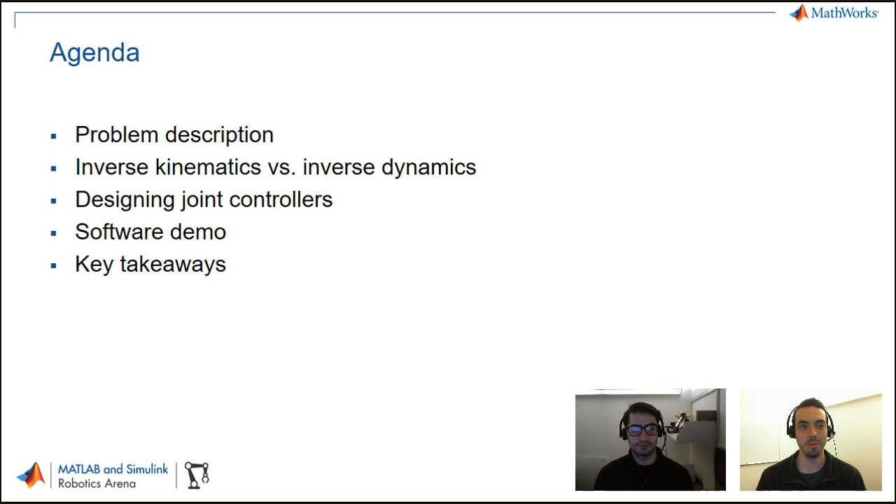So, what we talk about today is, first of all, what is the problem that we're trying to solve? And then we'll dig deeper into a couple of things, namely this notion of what is inverse kinematics versus inverse dynamics, which is going to be an important thing for today's video. And then also talk about designing controllers for the joints of a robot manipulator. Most of the time will be spent on the software, so that's what makes today extra fun. And, as always, we'll wrap it up with some key takeaways.

In the previous video, we had this robot arm here, which is the ROBOTIS OpenManipulator chain. And what we did is we created a couple of tasks, including grasping an object and moving it through a set of waypoints and even tracking its position to grab it. So we're going to continue with those same requirements, but now we're adding an extra layer of complexity, which has to do with actually controlling the joints.

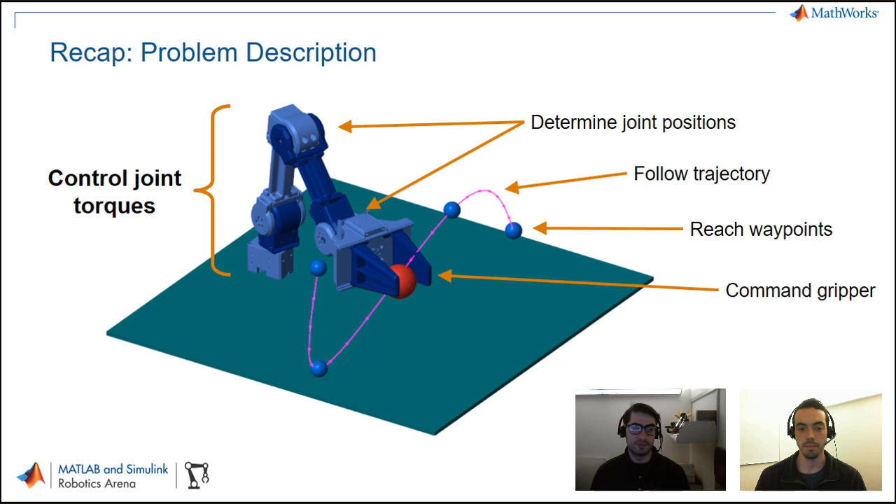Thanks, Sebastian. And one more thing, if you guys remember correctly, we did all of this in Simscape Multibody, and we used the option of using motion actuation for the joints. So that is why we were able to do this with just the position for the joints last time. This time we're going to be actually looking at some more motor performance.

Yeah. So this is ultimately the goal that we're trying to solve, right? You want to move the robot gripper or the end effector to a particular position. In the last part, we talked about kinematics, namely the forward and the inverse kinematics. And that's what maps you from the actual angles or displacements of the joints to the position of the end effector.

So forward kinematics is the easy one to solve. If you have the robot geometry, you can just figure out where a particular coordinate system is going to be. And then we saw how the inverse kinematics in the Robotics System Toolbox lets you use an iterative solver to figure out these joint positions given a specified position. And we were able to design all these algorithms by commanding that position of the robot.

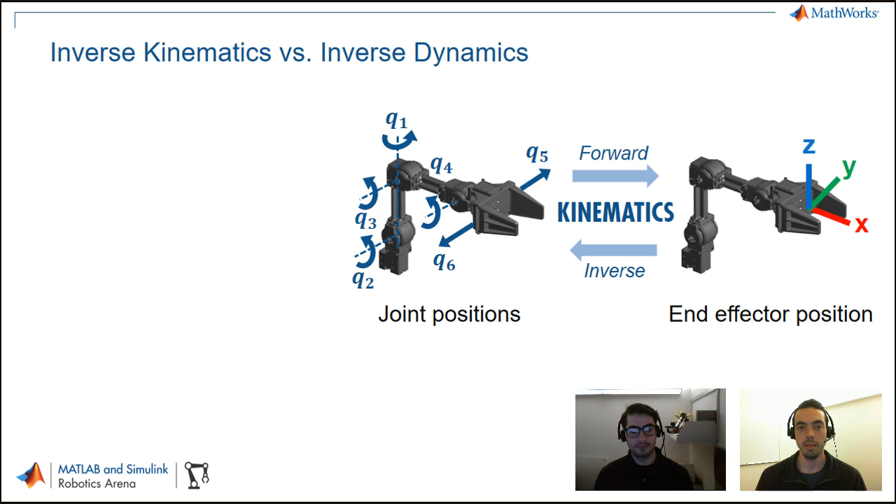The next step is then to consider dynamics. And this has to do with, given the angular or the displacement positions of your robot joints, what are the necessary forces and torques to make that happen? The additional information you need there is, in addition to just the geometry of the robot, you now need to know things like the masses, the moments of inertia, and so on. And that's what we're going to dig into.

Sebastian, in order to obtain those masses and moments of inertia, do you have some suggestions for that? Yeah, so let me jump over to the software really quickly. So what I ended up doing to get these masses is I found the Onshape CAD model for this robot arm. And what you can do in most CAD platforms is you can assign materials to these things. So for example, we know that this robot is 3D printed, so we pick a material that is related to that.

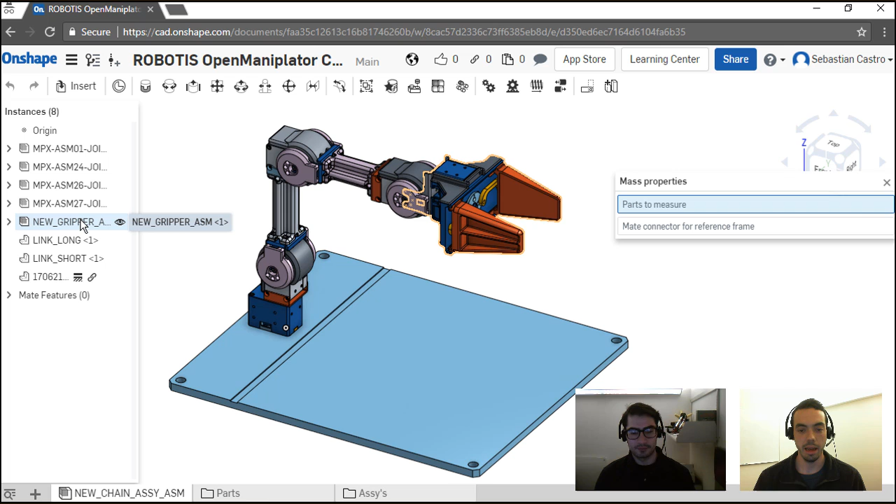And what you can do in most tools, like if you select a particular body or rigid link in your robot, you can open up these little mass properties, and then this gives you things like the mass, the center of mass, and the moments that are needed for those parts.

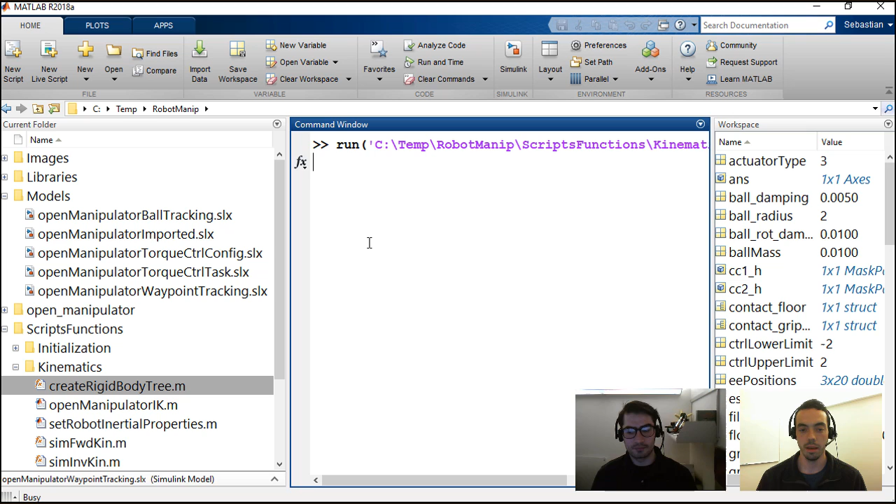When you go into MATLAB, when you define that rigid body tree, as you saw, we can basically define our manipulator by importing its geometry into MATLAB. Now we can also add its inertial properties. To do that, I've used a script that basically grabs all these values from that CAD model I showed you, and it assigns them for each of the rigid bodies that make up this robot.

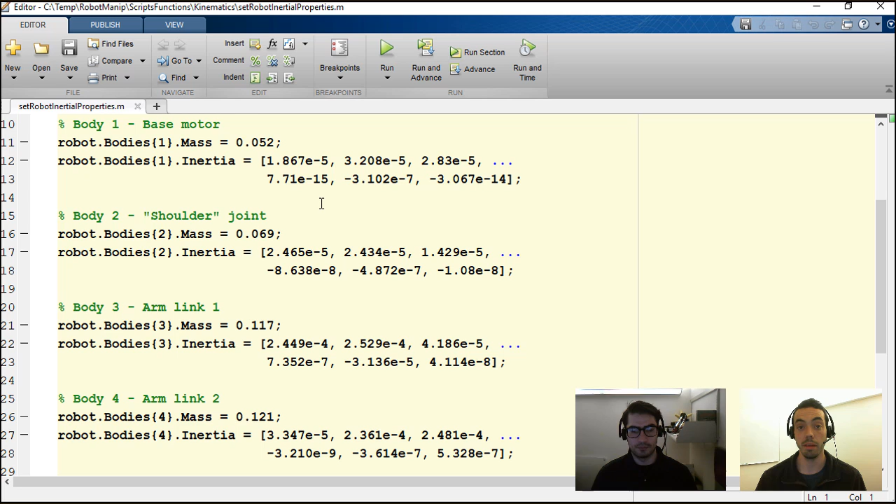So you see each body here has its own mass and 6 elements of inertia. That is the 3 moments of inertia and the 3 products of inertia that define the off-diagonal terms. So once we have this is when we can start solving the inverse dynamics for the robot. So we have that, but then the part that we're still missing is how do we actually assign these forces and torques? And to do that, you need controls, and that's really the main focus of this video.

You have your manipulator, you have your desired motion, and you have your actual measured motion of the robot. Now, there's lots of different ways to design your controller, but generally they kind of get broken down into this feed forward and feedback elements. Feedback is probably the one that is most common in all controllers. It's where you take the difference or the error between your desired or reference motion and your measured, and then you try to do something to correct that. In our case, it would be to apply torques.

So I think the most naive way to do a control of this arm would be to just take each individual joint and then have six separate PID controllers for them. But there's other ways to tackle this as well. Sebastian, so in this particular control block, what are we expecting to see in different robots? This is kind of where simulation is the key thing, which is why we're discussing it.

With simulation, it's pretty easy to just experiment with different controller architectures. So you can try controllers that have only feedback or feedback and feed forward. You can have different types of controllers for each of these, and all in a safe environment. We'll show you two different types of controllers just as a taste of the kind of experimentation that you can do. One thing to note on the feed forward side, there's a couple ways to do that as well.

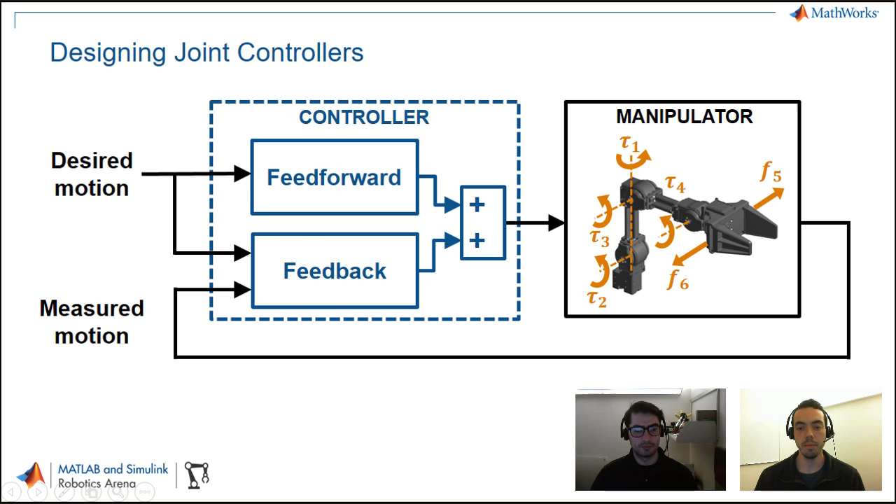Same thing, like if you're trying to get to a certain position, maybe you can use some of that information to help guide your input torques to be better. I guess one more note on that, the feed forward doesn't have to use a model of the robot. You could also just have feed forward gains and design your own thing. So just leaving it at that there. I think we should just jump right into the software. Sounds good. Let's take a look at the software right now.

All right. So revisiting the models from the previous section, we're going to start with this waypoint tracking model. And if you've watched the previous video, you might see this as familiar. So we had this Stateflow chart that actually dictated all our waypoint following logic, and we haven't really changed anything here. What's different in these files is now if you see the bottom of the model, you have three different actuator types to explore. So you have your ideal motion actuation, where you give the arm positions and it just goes there. And then we also have two different types of controllers that we're going to be exploring.

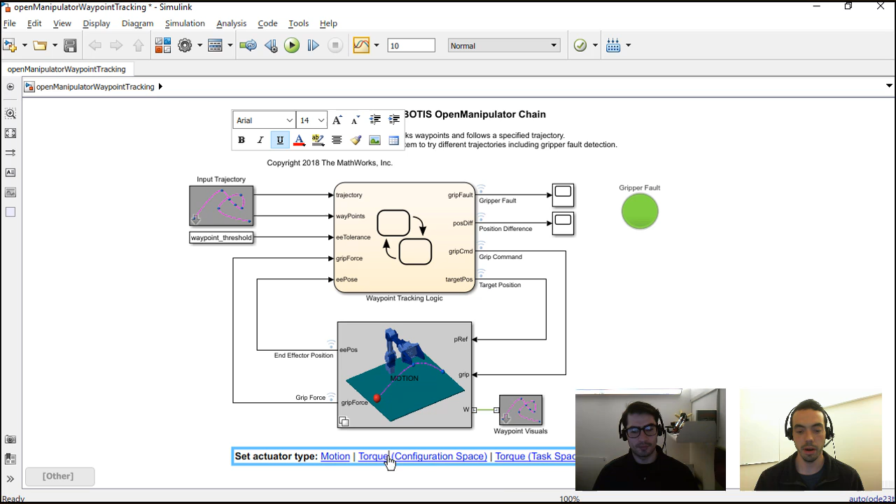So I've already run the motion actuation simulation. If I rerun it for you, you'll see that the robot is able to pick up this ball, move it around a trajectory, and finally drop it off at the end. And again, all with perfect actuation. So if we now add torque or force actuation to this robot, I'm just going to switch this over to use this configuration space torque model. Sebastian, and these clickable links that you have in the bottom, what are they doing in the model to be exact? Yeah, that's a good point. So these are actually setting up different variants.

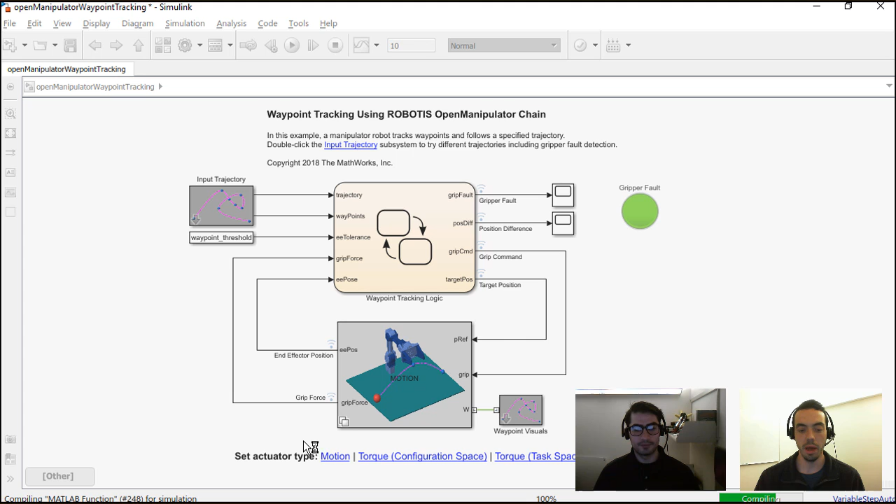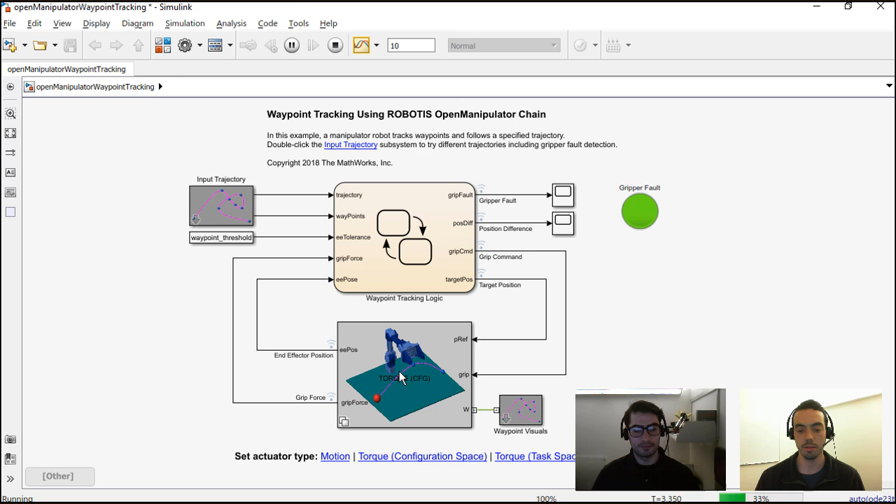So the block that's at the bottom of this model, which is basically our simulation model, depending on which of those three links you click, it will change the implementation underneath. So we're going to jump now into the differences between these blocks, right? The model underneath, you see that there's, like I said, three different subsystems, and we've just selected the first torque actuated block, and we label this one as using a configuration space controller.

We'll talk about that. So if we go into this block, you'll basically see it contains our robot simulation model as well as the environment model, but then it's also got some of the control components around it. This is labeled as a configuration space controller. What that means is that the controller already accepts the joint angles as its reference input. What that means is that you first have to solve the inverse kinematics because you're giving the robot an XYZ target position and you have to convert that to joints. So using the outputs of the inverse kinematics, you then do the control and then you pass that into the actual robot.

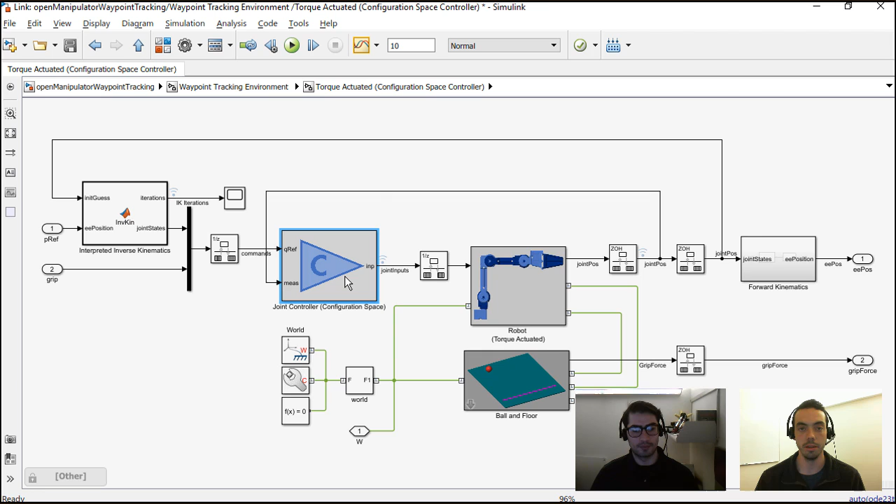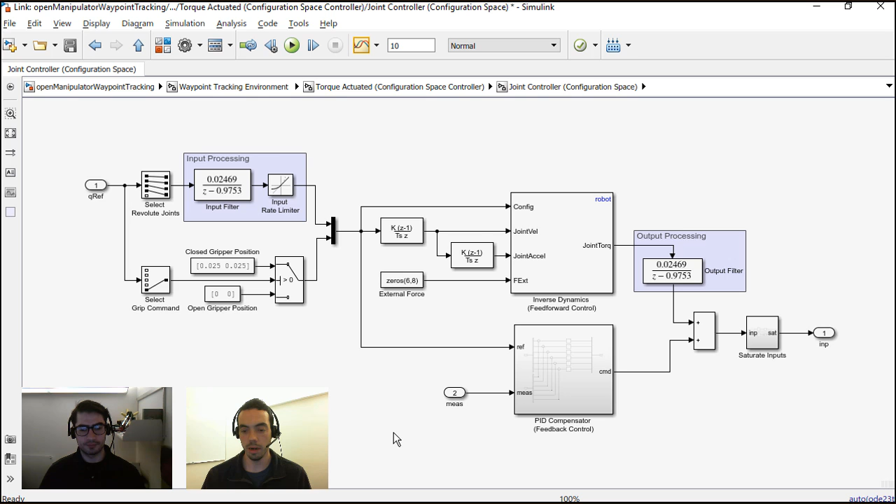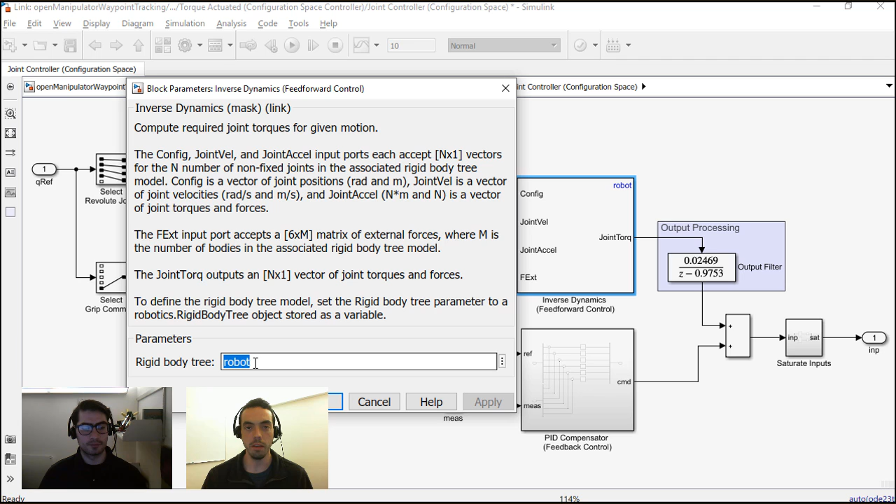Let's look into the joint controller. Sebastian, and the output of this controller is going to be torques, right? Not position anymore. Exactly. So it's going to be the four torques of the angular joints and then the two forces on the grippers. So if we take a look at this controller, basically there's two primary components that we've highlighted here. So you have the inverse dynamics, which is doing the feed forward part. And you see these are new blocks in the 2018A release, by the way, where once you've defined your rigid body tree for your robot, you can pass that into Simulink and it will do all these common tasks like inverse dynamics, forward kinematics, and so on.

So again, our feed forward part is using inverse dynamics. It's saying with knowledge of the geometry and the dynamics of the robot, if I have a target configuration, velocity, and acceleration, then give me the necessary torques and forces. And then at the bottom, we have a PID compensator that picks up the slack. What this helps you account for are things like disturbances, whether it be sensor noise or external disturbances, but also things that are not accounted for in the rigid body tree model. For example, if your joints have damping on them. So it's always good to have some kind of feedback in any of your models.

Okay, Sebastian, I noticed that the inverse dynamics block takes in the robot configuration, the joint velocities, and the joint accelerations. And you've used a derivative here. Is there any other situation in which you might do something different? Yeah, in fact, I would encourage all of you out there to do something different. The way that inverse dynamics works, because you're computing forces and torques, just passing it a position is not enough. You have to also tell it at what velocity and what acceleration it should be in. So what we did here, as you just said, Jose, is we're using a discrete derivative to approximate this given our position measurements, which is very susceptible to noise.

There are ways to improve on this. For example, if you're doing a curve or spline-based trajectory, then you already have a parameterized curve for your position over time. And these curves are designed to have analytical derivatives. So what would make this a lot smoother is if you had these curves, you would then also have expressions for the first and second derivatives and pass these directly into the blocks. I see. So basically, the more information you have about the task you want to complete, instead of directly deriving this, you should be able to provide separate individual signals, right? Exactly. In fact, derivatives is one, but another one that you could use is if you actually have velocity measurements in your joints, that would help as well.

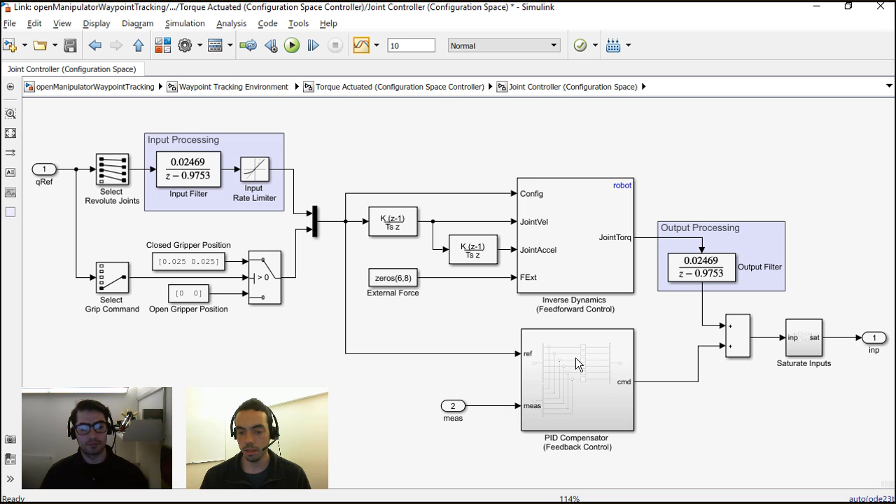Oh, I see. Yeah. The way that we've gone around it here, if you see these blue boxes in the controller, is that we've decided to filter the input and output with just basic low-pass filters so that we're actually smoothing out the motion. And we found that that helped a lot. So, yeah, last thing, just to dig into the feedback control really quick, you see that here I basically just have 6 PID controller blocks.

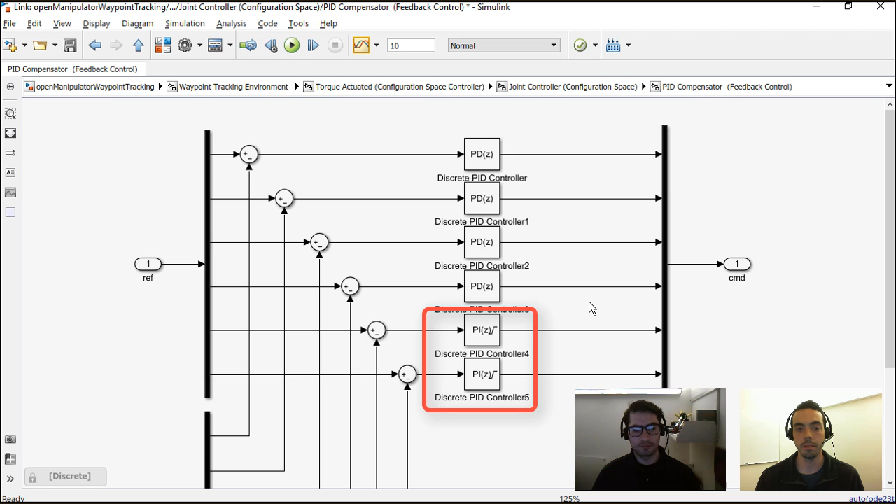There's going to be 4 proportional derivative controllers for the 4 angular or rotational joints, and then 2 proportional integral controllers that manage the gripper. So I've got the simulation that already ran. I'll just rerun it for you. And at a first glance, you can't really see the differences between the motion and the torque simulation. However, you can always do run comparisons in Simulink.

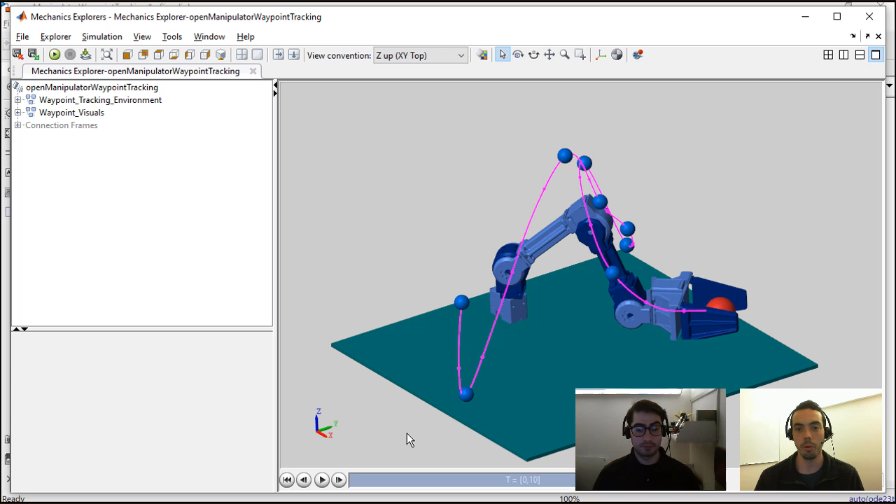What we're interested in is now that we have this torque controller, can we actually look at the torque that was needed to make this motion happen? So to do that, I'll open up our simulation data inspector here. And I'm just going to configure it really quickly to display what I call the joint input signal. So this contains basically the 6 inputs to the joints. So you have the 4 torques for the 4 rotational joints, and again, the 2 gripper signals there.

So you'll see, for example, that because of the filters, this signal is relatively smooth, except you've got these big jagged edges. And this has to do with how we do the waypoint tracking. We're actually just sequentially going from one waypoint to the next. And every time you immediately jump from one waypoint to the other, you get this big spike in torque. So I invite everyone to create smoother planning, or if you're interested in seeing videos where we talk more about motion planning for manipulation, that'd be really interesting to hear.

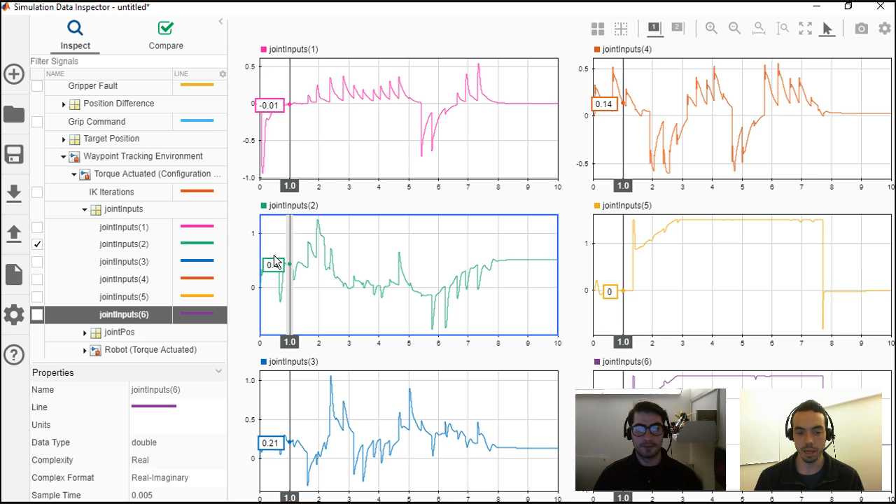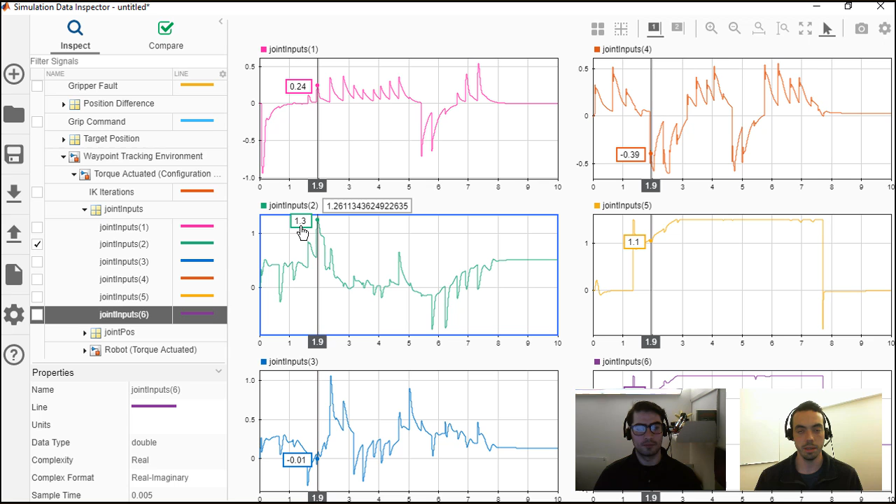Cool, Sebastian. And basically, with these plots, I would be able to go back and look at my motor specs and then decide whether this controller is going to work in my system or not, right? Yeah, and that's a very good point. So if we just do a quick glance, I'm just going to put in the cursors here. For example, you'll see that the biggest torque that we're seeing in this motion is something like 1.3 Newton meters. So like you said, it's a good benchmark to see, can your motor provide this torque at that speed? Do you have to pick a different gear ratio for your actuators? Do you maybe need a different motor? So I think all of this will certainly help you with design.

If you remember, we had another example that had to do with ball tracking. So this is a different motion that used the same kind of control, namely the inverse kinematics, but it used a different supervisory logic. So instead of tracking waypoints now, it was looking at the position of a ball over time and actually grabbing it out of the air. So what I'll do is I'm going to switch to the third controller type here, which is the task space controller, and I'll run the model. Okay, so we've slowed down the simulation. You see the ball's in the air and the robot is able to catch it. So this was a task that we had proven in the previous video with motion actuation, but now we've done it also with torque. So I'll just replay that.

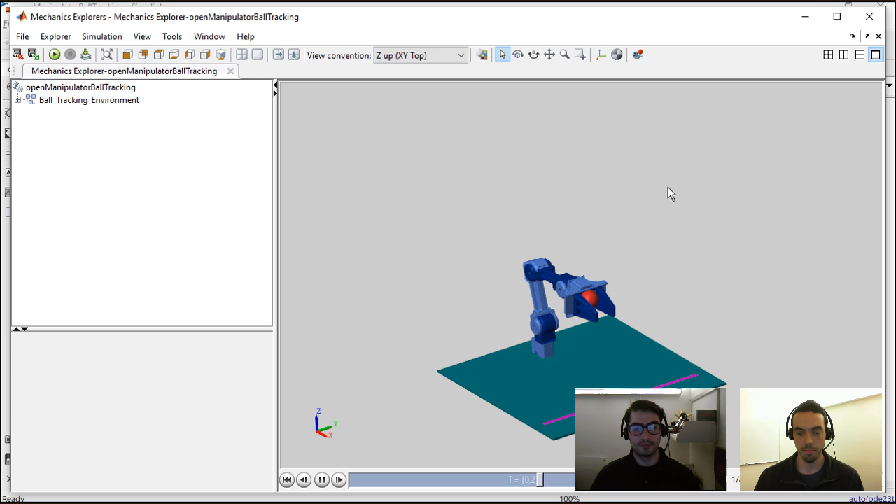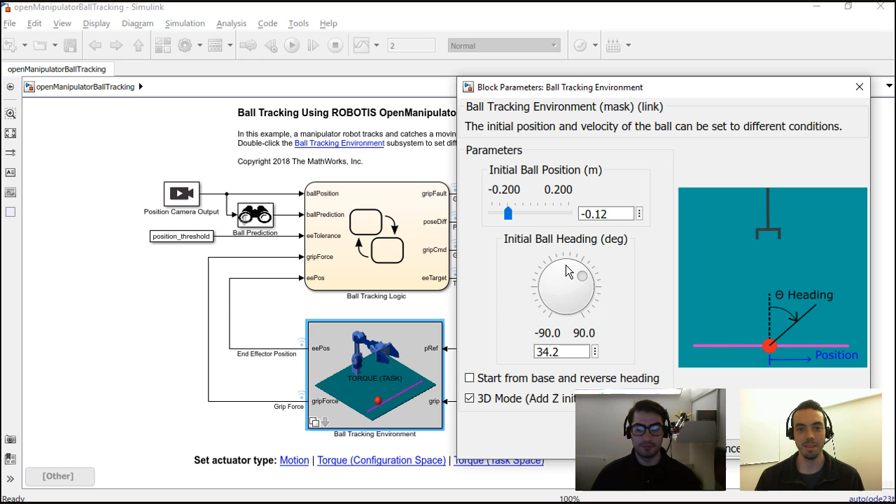Okay. If I go back to the model, you see that for this one, if you recall, you could double click the block here and you could change your initial position, heading, and even whether the ball is airborne or just rolls on the ground. So I invite you to try to break this controller. I bet it's pretty doable. More importantly, I invite you to try and make it more robust.

So why don't we dig into this new controller that we chose, which is the task space controller. Sebastian, what would be the major difference between the task space controller and the configuration space controller? So task space here denotes that we're doing the control directly on the Cartesian or the XYZ position of the gripper. This means that we don't need to solve inverse kinematics here.

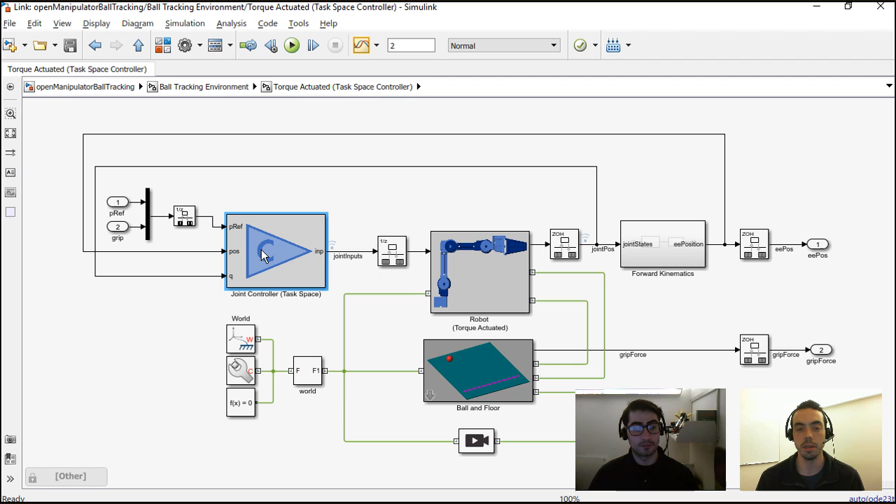The way that we do inverse kinematics in the Robotics System Toolbox is it's all using an optimization algorithm, which means that it's an iterative solver that can take some time to converge. It could also not converge depending on the inputs you give it or the initial conditions. So this completely gets around that, which could potentially give you a boost in speed. Maybe you could instead implement your own analytical inverse kinematics that, instead of using optimization, you just have the equations that would solve it. But that's on the robot designer to see if that's possible.

So I think in the previous demo we were using the inverse kinematics, so we had to keep an eye out for the number of iterations that it went through, right? Yeah, exactly. So in this case, we're doing something completely different without any need for iterations. Let's explore how we did that then.

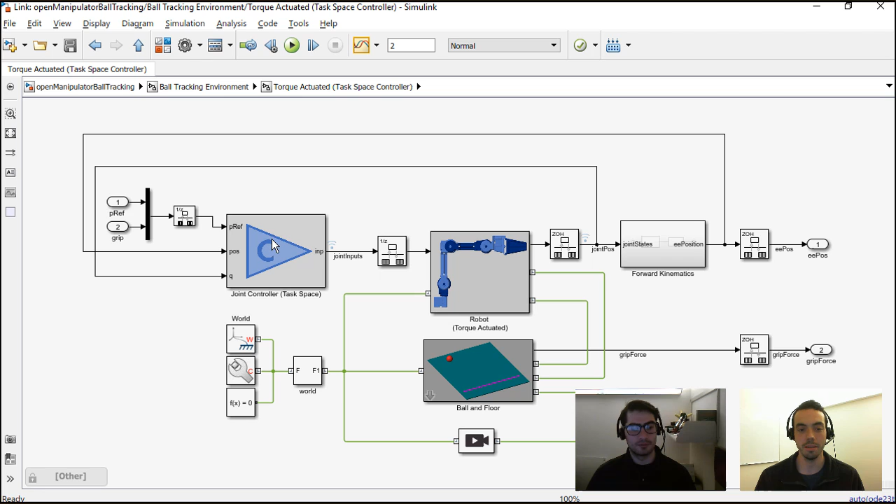If we go into the task space controller, you see that this controller structure looks a lot different. Everything that I've just highlighted at the bottom here is actually the same from the other controller, and that's because we've decoupled the gripper control from the other four joints. But the interesting part that we're going to focus on is, how do we control those four revolute joints?

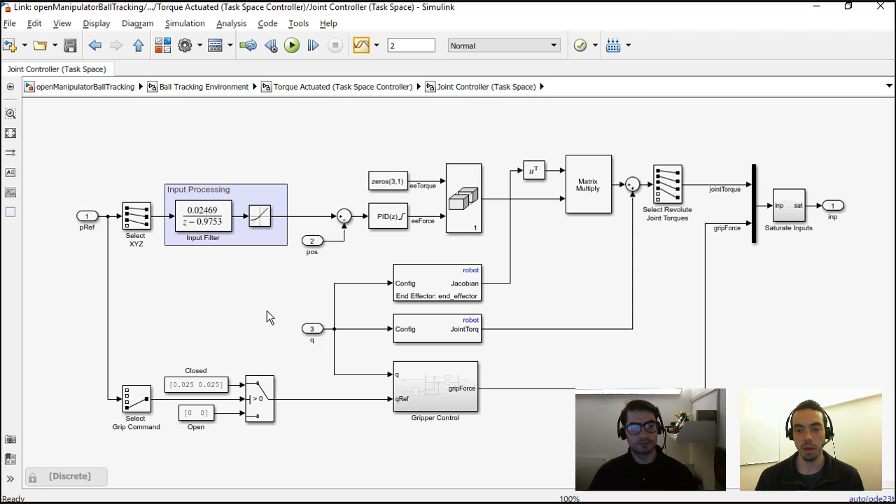We pass in the reference end effector position, XYZ, and we compare it against the actual measured position of the end effector, run it through a PID controller, and then that gives us basically an equivalent force to apply to the end effector. But then that still leaves us a question. So how do we convert from the end effector or the Cartesian space to the actual joints? And that uses the notion of Jacobian. If I double click this block, you see that we provide a block for it.

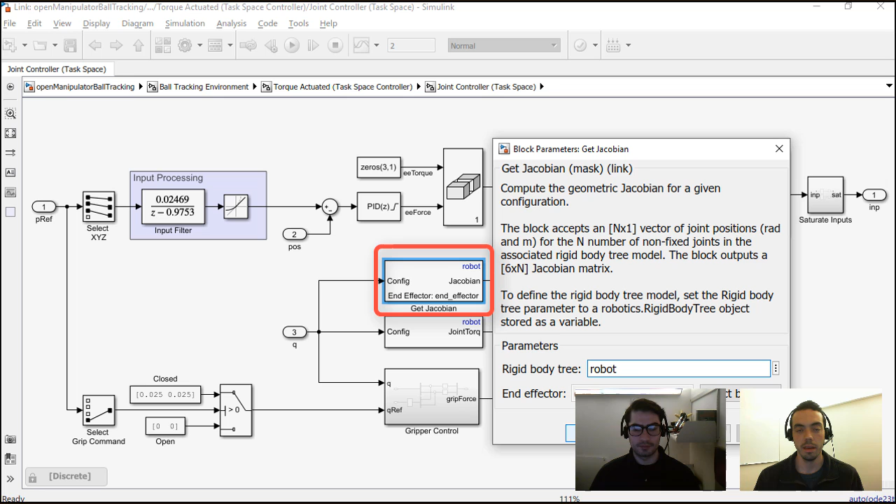The definition of the Jacobian here is it's basically a mapping from the velocities in Cartesian space, so x, y, z, and angular speeds, to the actual velocities of the joints. So it gives you a way to do the control basically in the task space, and then you can multiply that output by the Jacobian and then get basically torques that you can pass into your manipulator. And this is what really replaces the inverse kinematics.

Quick question, Sebastian. So if I'm correct, you should be able to take into account the X, Y, and Z positions of the end effector and the X, Y, and Z orientations of the end effector. So how does the controller account for those? If you notice what gets passed into the matrix multiplication, we're actually chaining the output of the PID controller with a bunch of zeros. So in this case, we're saying we don't care about orientation, but you might. So you could replace this also with some kind of controller behavior that would also similarly try to set the orientation of your end effector. And then all of that again gets converted to whatever torques and forces are needed on the joint space.

The last thing to note is that we still have a feed forward component to this controller, which is this gravity torque block. So regardless of the rest of the controller, whatever output we get from the PID with the Jacobian, we're also summing up the torque needed to compensate for gravity. And we find that's very useful because otherwise, to overcome that gravitational acceleration, your PID controller would have to be tuned differently, and it would depend heavily on where you are. So this decouples the gravity from the tracking portion of the controller.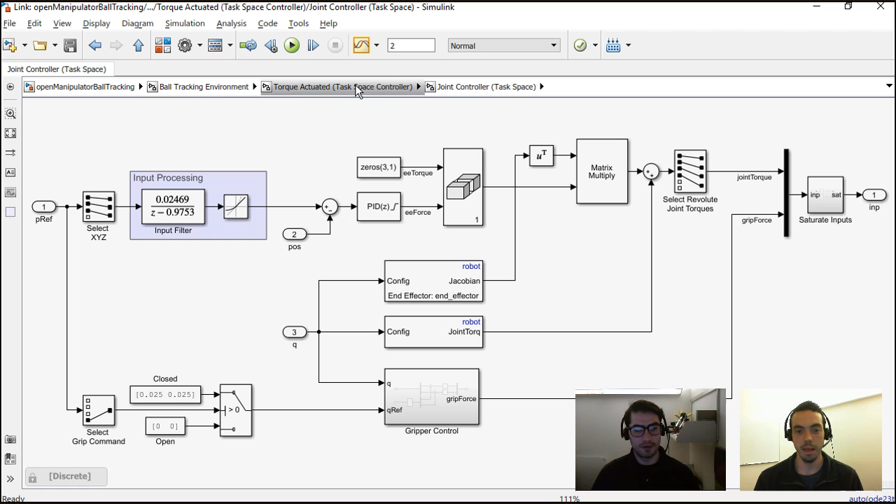Sebastian, these control algorithms seem like they're fairly complex. How did you go about implementing them and trying them out before you put them in the actual robot model and make them implement tasks and things like that? Yeah, that's a very good question because we definitely didn't just get to this point, right? In fact, these plots are magical to see, I would say. The fact that we can see these torques, these joint inputs becoming stable is a product of having tested these controllers on their own first, and that's something that you should definitely do as well.

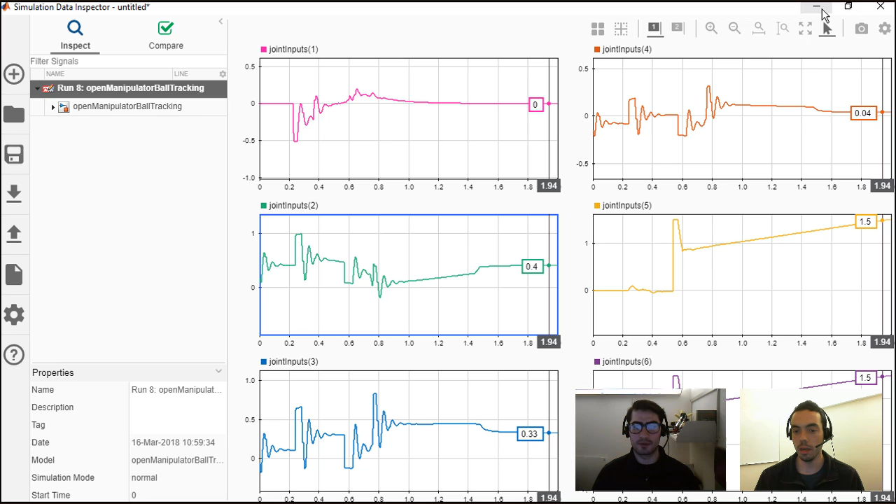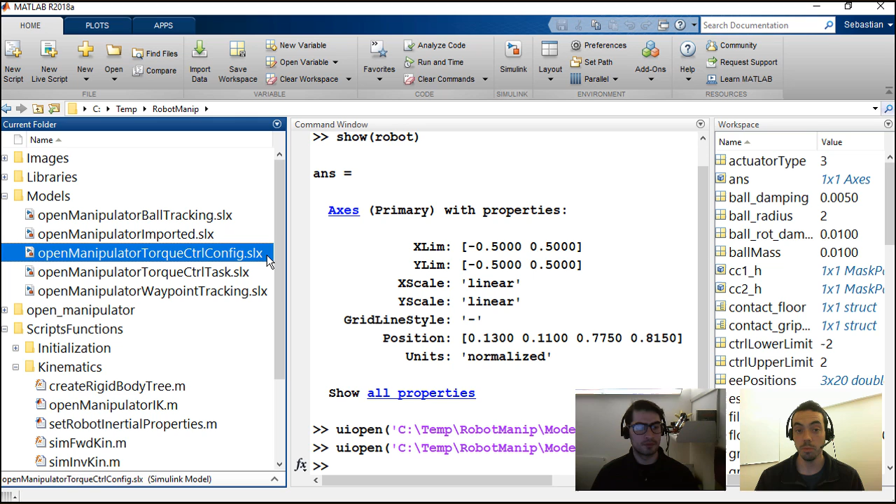So as part of the updated File Exchange submission for this, we have provided a couple of test models that you can use. There's namely the torque control in configuration space test model and the task space. So I'll just open up one of these and show you what we mean. Basically, to check whether your robot arm can move to a particular point, you don't need to put it in this waypoint tracking or this ball tracking framework, right? All you need to do is give it some kind of reference input and see if it follows that. So this model has a couple of sinusoidal inputs for the joint angles, and this lets you test the controller to see if it behaves properly.

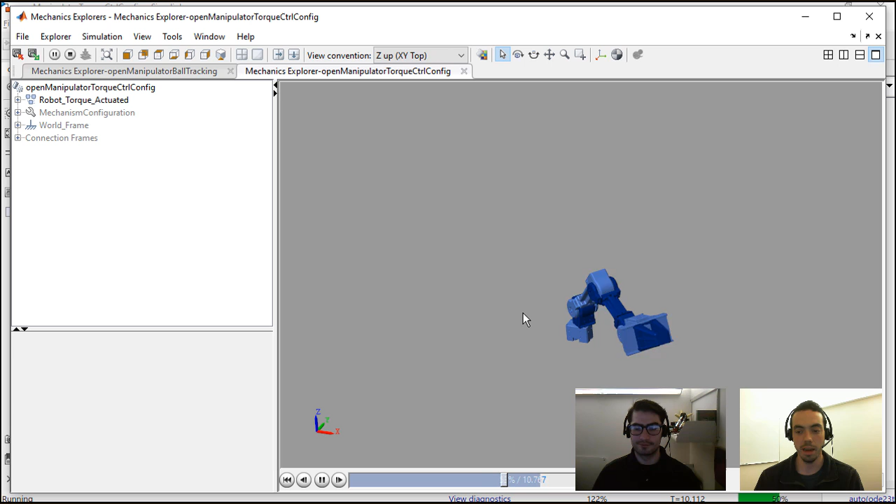And you see I've got some measurements on the right as well, which we can just use to validate whether this worked. So for instance, what I would recommend is, can your robot respond to joint commands that let it explore its full space? So you see this robot is snaking around, it closes its gripper, and you kind of want to verify this first before you put it into your planning.

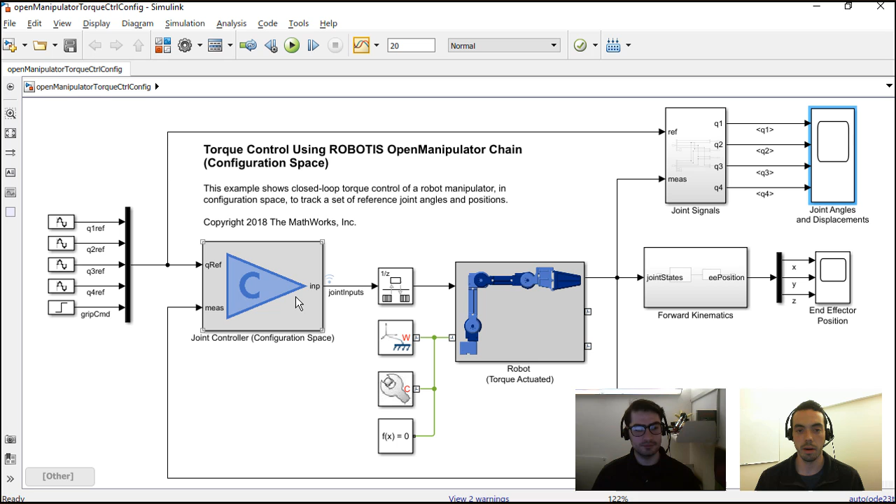So if I plot, for example, the joint angles versus their actual measured values, you see that there's a little bit of a delay between the reference and the actual, but overall the tracking is pretty good. Right. And of course, by simplifying the model, it also lets you use some of our control design tools that are available in Simulink. So if I go really quickly to one of the proportional derivative compensators in this model, if I click the PID block, there's the little tune button.

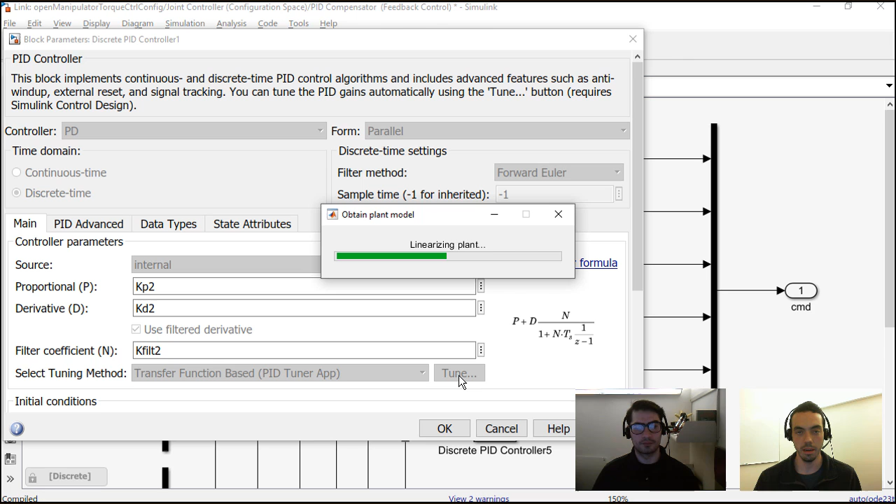And what that's going to do is it's going to linearize my plant, or give me a linear approximation of the robot model about a certain point. And then it lets me, if I want, tweak the control parameters. So you see here, I can start playing with these sliders and see if I can design a better controller and then try to resimulate it.

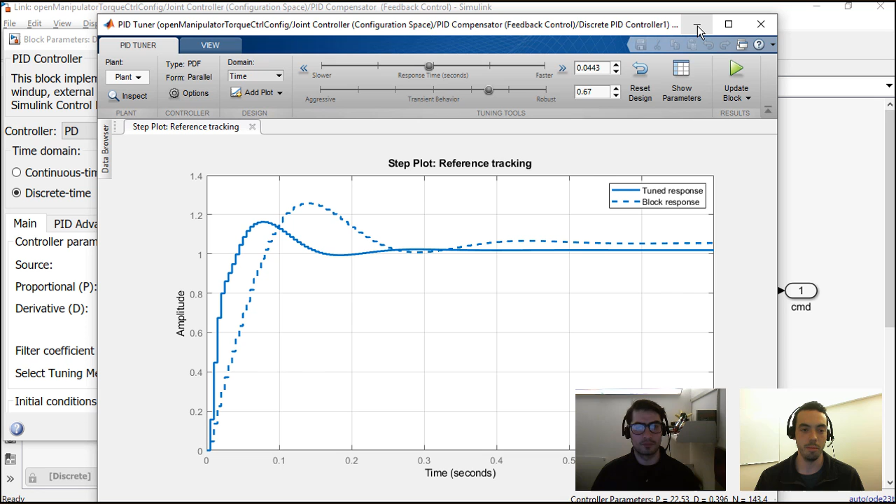Okay, Sebastian, thank you very much for showing us all of those inverse dynamics tricks. Why don't you walk us through a couple of key takeaways from what we went through today? Sure. I got 4 points here. I think that the first two just have to do with learning the language of manipulation. Knowing what kinematics is versus what dynamics is an important thing. So again, kinematics has to do with only the robot geometry.

How do you map between the joint positions and the actual location of an interesting coordinate frame in your robot, usually the gripper? If you're already using a pre-made robot, chances are that the manufacturer has already provided their own controllers under the hood, and you only need to care about kinematics. However, if you have access to torque control on your manipulator or you're designing your own, then you also need to worry about the dynamics.

So how do you find the necessary joint torques and forces to achieve certain positions? And that's what we've covered in this video primarily. We talked a lot about simulation. So the fact that we are able to import robot geometries into MATLAB and Simulink lets you experiment with lots of different controller architectures. So we showed you the configuration space versus the task space controller. There's lots more you can try.